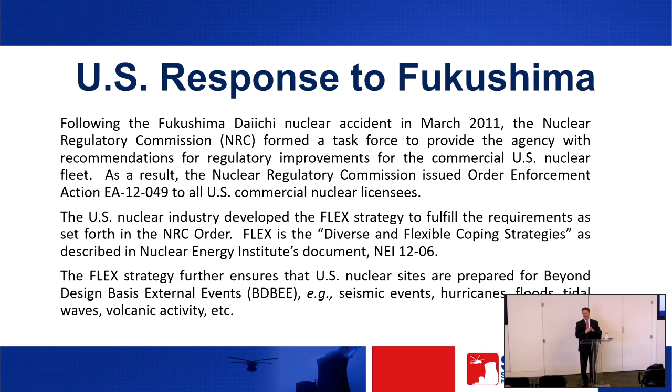The key aspect is that we are preventing this event from damaging the site such that we have a radioactive release. Everything is a preventive measure, such that we're not responding to an event where the reactor has gone south on us. We're responding to keep it from going south. That's the whole impetus behind this approach. Okay? So here's what the order looks like. It's about 3 more pages deeper than this, but here are some of the core tenets of the order that the NRC put out. The key point is to maintain or restore core cooling to the reactor, the containment building, or the spent fuel pool. Those are the key functions that this order is all about, and what was put in place across the U.S. nuclear industry.

So there are 3 phases to it. Phase 1, use of plant installed equipment and resources. So what does that mean? That means design changes that needed to be done to ensure that core cooling is maintained, or containment or spent fuel functions. Then phase 2: once we had design changes implemented at the plant, phase 2 was the transition into on-site emergency equipment. All of these sites across the United States have their own portable emergency backup equipment that they pull out of facilities, get to the reactor, and hook up to different connections to ensure that these functions are maintained. Okay, so that kind of makes sense. Phase 2 is the on-site emergency equipment.

And what I want to talk to you about today is the phase 3 equipment. That's the off-site emergency equipment. I'll talk to you about the deployment, what kind of equipment we've got, how much equipment we've got, what its capabilities are, and all those sorts of things. Okay, so phase 3, off-site emergency equipment.

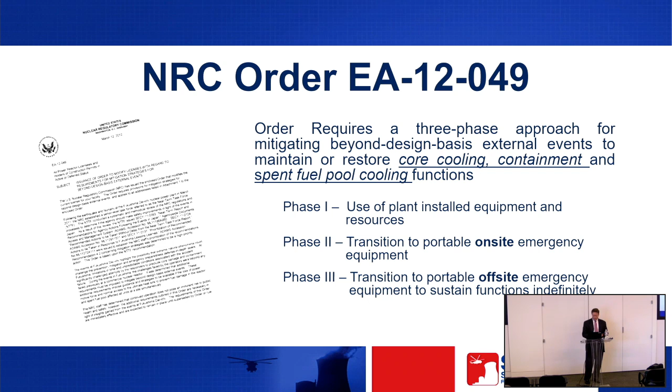All right, so when we first started this, the nuclear industry said, all right, who are we going to get to put this program in place for us? Well, the nuclear industry already has a company that they've established. It's called the Pooled Equipment Inventory Company. And that's a company that was established by the nuclear industry for the nuclear industry to store and maintain long

lead time equipment. So the Pooled Equipment Inventory Company teamed up with Framatome, and I'll talk more about Framatome here in a minute. But Framatome is the old Areva. Areva just went through some transitions about a year and a half ago, and the U.S. entity that we deal with of Areva is now called Framatome. All right. So they contracted with us to develop and manage a National SAFER Response Center program. So that's what we'll be talking about.

All right, so a little bit about the program. It meets the requirements of NEI 12-06, the Nuclear Energy Institute's document that I talked about, which established the Flex strategy, and the requirements of the order EA-12-049. It was endorsed by the NRC back in September of '14. We've done 2 proof of concept drills with the NRC. We've successfully completed 2 NRC inspections with no findings.

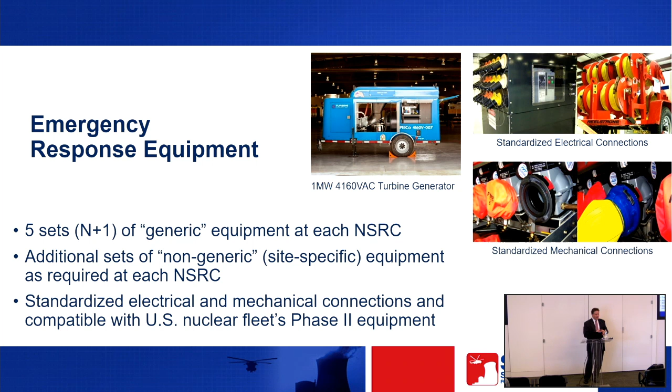NRC has been very adamant about inspecting this across the United States. So we know that when this equipment shows up, they can connect it to the plant sites. And that is a very, very big deal to get the United States industry to all agree to using the same size connectors. So that was a fundamental core design parameter that had to be established early on, and it has served us well.

Okay, so a little bit about the equipment design. The bulk of this equipment is first in kind. So what does that mean? Well, we had to design the equipment to fit through the cargo door of a wide-body jet. We had to design the equipment light enough so that we could fly it underneath a heavy-lift helicopter. We had to design the equipment to where we could operate it in Arctic and desert conditions.

So that threw a lot of challenges at our suppliers when we were going through the specification and procurement phase of this. A lot of these people build a lot of different kinds of pumps and generators, but when you start throwing these kind of constraints on them, a lot of people were out. There was a lot of custom engineering just to figure some of this out. And I'll show you a generator here, and I'll point out some of the details just to show you what the difference is. But this really, really drove the cost of this equipment up.

Another key aspect about the equipment is that it's all operated on diesel. Why diesel? Diesel is what the sites have in their emergency day tanks, okay? So typically plant sites across the United States have roughly 70 to 150,000 gallons of diesel on hand. So all equipment runs on diesel with a minimum 12-hour run time. You have a lot of equipment deployed on that site. You're going to have people full-time just fueling equipment just to keep it operable. So that 12-hour runtime was very important.

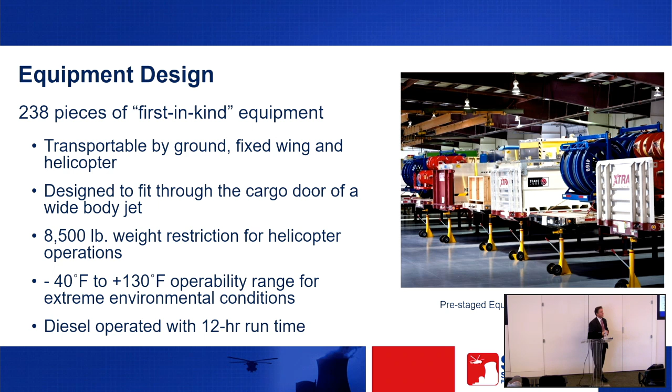That's one of the givens. That's beyond... having the fuel on site is a given. That's correct. That is correct. That is a given that the NRC agrees to. That's correct. Good question.

All right, so here are a few equipment examples. There's a water treatment system there in the top left-hand corner. That's a very important piece of equipment. It was actually manufactured for us in Israel, so we had people over there as we were going through the build phase of this thing. But this equipment here takes seawater or brackish water and makes reactor quality water. That's ultra pure water. That is water you would not want to put in your body. So it can take just the dirtiest water and make water we can actually input into the reactor.

The next one over there, we'll look at the green pump here, 5,000 GPM pump. That one will fill your backyard swimming pool in about 5 minutes, okay, if you got a 20 by 40. That's how much water that thing's moving, okay? And I'll tell you a little bit more of the overall capacity of the NSRC.

The turbine generator up there, it's a 1 megawatt, 480 volt turbine generator. We've got 4160 volt turbine generators. You're not seeing the picture there, but you have over 30 megawatts of capacity of power within the NSRC. That's enough to power about 24,000 homes. Okay, so that tells you what we're bringing to bear.

But that piece of equipment right there, we talked about custom design. If we did that with a regular diesel engine instead of a turbine, it would take up an entire flatbed trailer, and it would weigh anywhere between 43,000 and 48,000 pounds. With that gas turbine, we can get it in under 8,500 pounds. So that's some of that custom-built stuff we're talking about.

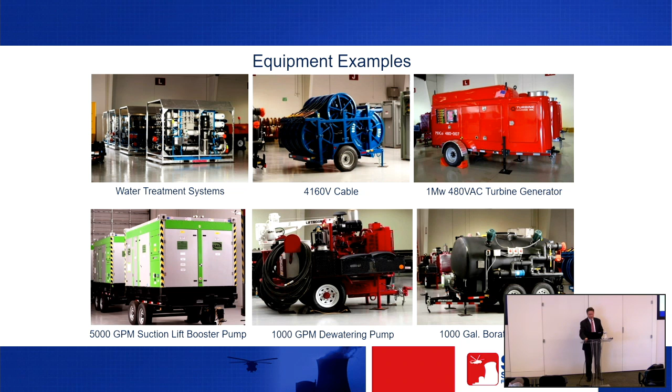So it's a massive response that's available to these nuclear sites. When it's all said and done, there's really enough equipment there for about 10 reactors, if you count both sets in both response centers. So it's a huge response. Sonia has seen it and really kind of taken in the magnitude of at least one of the response centers. So there's a lot that can be brought to bear for the U.S. nuclear fleet.

Okay, now it's fun to have all this equipment, but you got to get it there, right? I've had Bob Willard, the president of the Institute of Nuclear Power Operations, who was a commander or admiral of the Pacific Fleet, through, and this is what he honed in on. He wanted to know how you're going to get it there, right? If anybody knows logistics, it's an admiral of the Pacific Fleet.

So we have some key contracts in place with FedEx Custom Critical. Now, this is not the FedEx that you and I would use to send a package overnight. This is a white glove service that they offer to like 2 other entities in the United States for emergency response. Key part about FedEx Custom Critical, they were the first airplanes back up in the United States after 9/11. They have those kind of connections in Washington, D.C. with the FAA. So they are a key player in our response. They provide not only the tractors and the trailers to haul this across the roads, but also the wide-body jets.

I will tell you that we drill with FedEx routinely, and it's always real-time drilling where they're pulling planes out of the air and what they've got available, when they can get truck drivers there to pick up the equipment. So it's all real-time drilling when we do it with FedEx Custom Critical. As far as helo, one of the key lessons learned from Fukushima was the ability to get the equipment into the site.

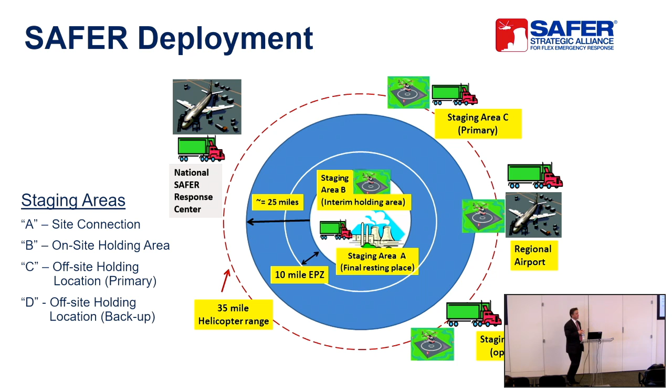What happens is he's going through that event. He's going down through his procedures, and it takes him to a point. Okay, and then it tells him execute off-site emergency equipment response, or the SAFER response. That throws him into another procedure. So there are procedures that operator is going through. It is not the Nuclear Regulatory Commission who makes the decision. It's the guy that's licensed at the helm. Okay, and that's what he's tasked to do, is to protect that plant. Okay, good question.

Do our connections still work that we hook all this equipment up to? What's the damage assessment to the staging areas? What equipment do we need to get in place to start removing debris? All those different things. What time are we going to be prepared for the equipment to start arriving?

Then the SAFER team on the bottom there, they're going to start activating through their site response plans all of their different coordinators. They're going to stand up the NSRCs, the SAFER Control Center. They're getting in touch with FedEx Custom Critical. They're calling the helicopter providers and getting the technicians moving from around the country towards the event and getting them into those forward locations.

Then the FedEx trucks start arriving. We're making a decision to either move it to the airport, we've got to fly it, or we're going to drive it all the way through. Trucks start arriving at the staging area, and then ultimately leaving the staging area at around 1900 or so and arriving at the site within about 24 hours. And I know I just said a lot, but that kind of lays it all out. Maybe you get back and you look at the presentation, it'll make a little bit more sense. But a lot going on there.

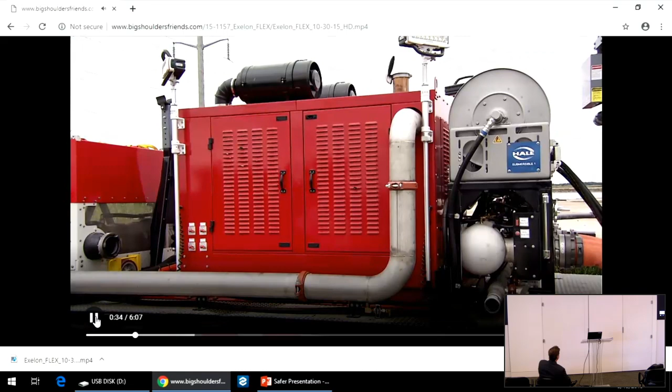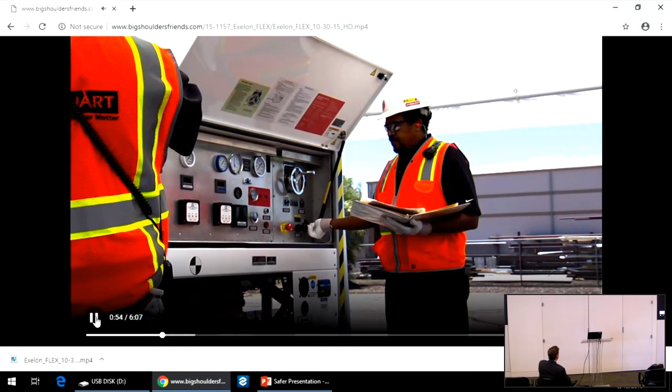In March 2011, the Fukushima Daiichi nuclear facility was struck by a massive earthquake and a tsunami that overwhelmed the site and its emergency systems. Since that event, the U.S. nuclear industry has changed its readiness approach for an extreme natural disaster. That solution is called FLEX. FLEX is a $4 billion industry effort to further strengthen U.S. nuclear facilities against natural disasters. The uniqueness of this strategy is that portable backup equipment designed to supplement a site's existing equipment can be deployed at a moment's notice. The Flex strategy uses the plant's installed backup equipment, on-site portable backup equipment, and additional off-site backup equipment which can be in place at any nuclear facility across the United States within 24 hours. That's an extraordinary turnaround. Flex adds yet another layer of protection to our plants.

Exelon sites are well prepared for an extreme event, and what you'll see in this video is that Flex strategy at work. It is a well-orchestrated plan involving a nuclear site, industry agencies, and national response centers. We are committed to operating our plants safely and to protecting the public, the communities, and our employees. Hi, this is Mike on Unit 1. We've had a loss of off-site power and our diesels have failed to start. Within seconds, operators initiate their emergency plan. Every 6 weeks, they simulate situations like this and are well prepared for the real thing.

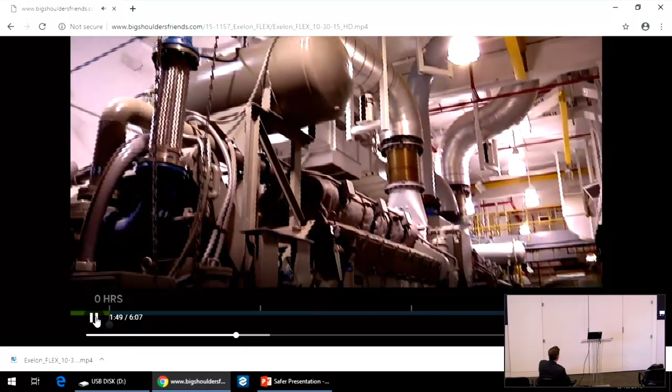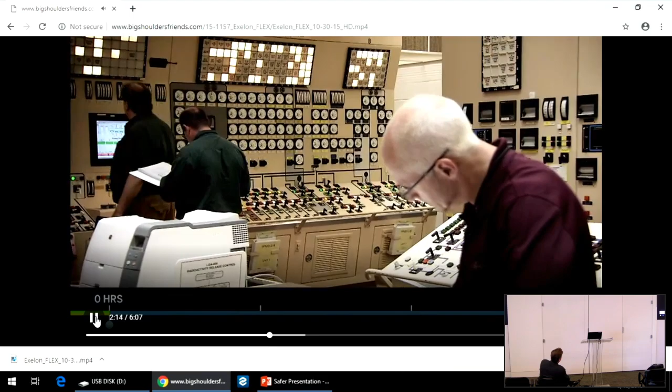In the unlikely event that power is lost, the plant's reactors shut down as they are designed to do. Exelon plants have a minimum of 2 backup diesel generators, which would start automatically to provide power. If all of those generators fail to start, then a multitude of backup batteries would kick in to provide power. We have equipment that is always on standby and is always ready to 100% cover the core if necessary. If something fails, then our Flex strategy provides a backup to the backup. The Flex strategy starts when there is an extended loss of power to the plant, and all of the plant's backup generators fail to start. All right, due to the extended loss of offsite power, we're going to implement the Flex strategies.

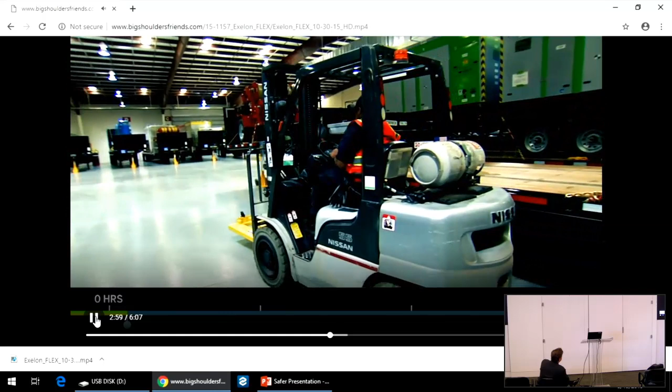Plant operators inform the company emergency coordinators that the Flex strategy has started. They also contact industry organizations to get extra equipment from other nuclear plants. Emergency coordinators then contact SAFER, the control center for the industry's 2 national response centers in Memphis, Tennessee, and Phoenix, Arizona, which send even more equipment as backup. These centers are football field-sized warehouses that store additional Flex equipment for the nation's nuclear plants that can be dispatched at a moment's notice. Timing is extremely critical.

We have to have the first piece of equipment on site and connected to the plant and operating within 24 hours. Trucks arrive to pick up preloaded equipment trailers. From here, the equipment travels to the affected site. We want to have our first trailer on the road by 3 hours for sure.

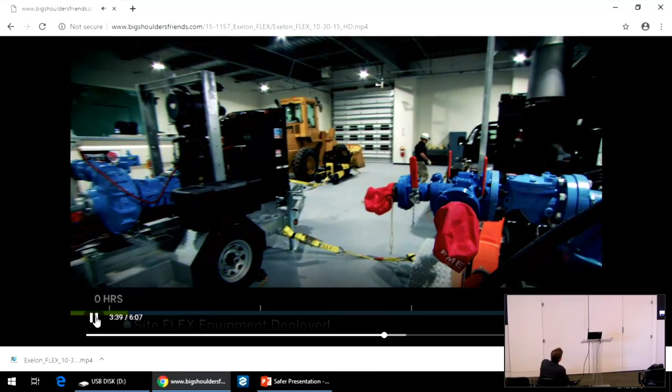Meanwhile, operators at the plant are already in motion. Each plant has its own flex building and backup equipment. The building's rebar reinforced concrete walls are nearly 2 feet thick, and the doors are covered with Kevlar, all of which protect the equipment inside from anything Mother Nature might throw at it. Equipment is mounted on trailers for easy transport.

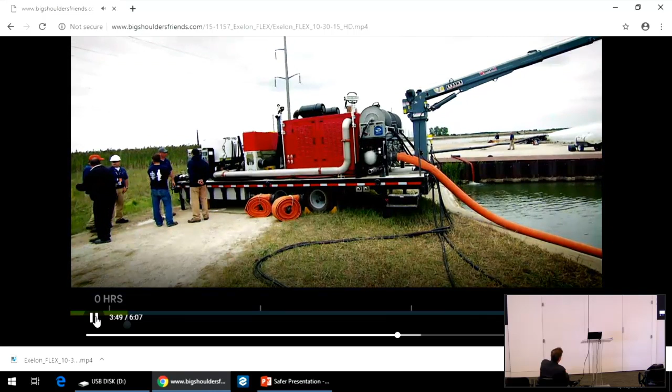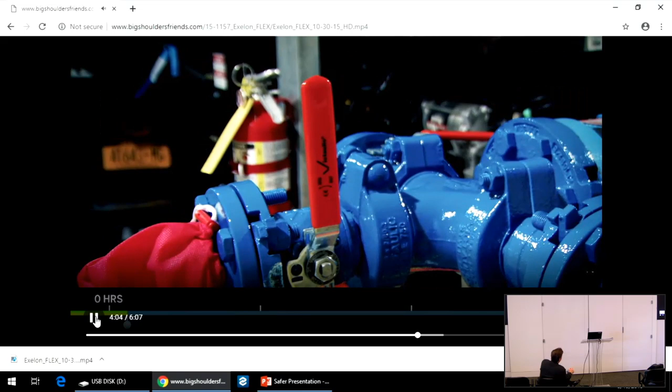Backup equipment here and at the Safer warehouse includes pumps that can fill a backyard swimming pool in 5 minutes, about a quarter mile of industrial-grade fire hoses to carry water to the reactor, huge generators that can power plant safety equipment, and lights that can illuminate 5 acres. These pumps and generators use standard connectors so they can easily hook up to any external flex equipment brought to the site.

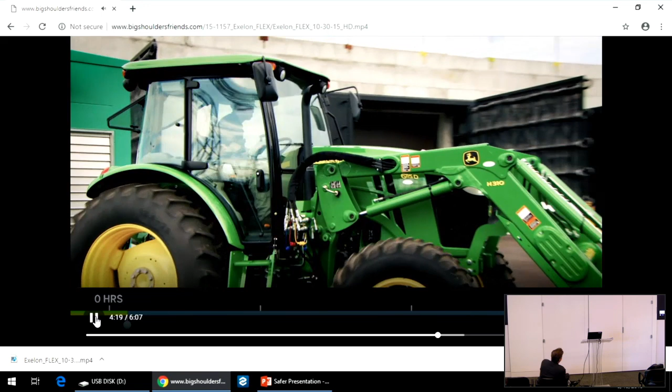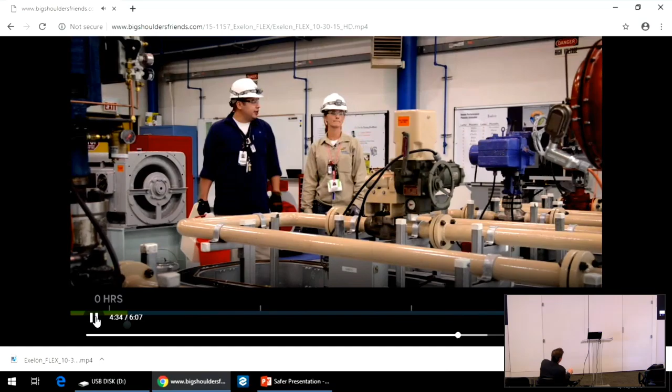We bring our equipment out of here and we have pre-planned routes throughout the site, and the routes are based on speed, ability to get around fallen debris. Inside the plant, operators monitor the reactor, plant systems, and conditions. Equipment is continually checked. They make sure the reactor and used fuel pools are being adequately cooled.

Back at the response center, the first of the backup flex equipment begins to leave the warehouse. Meanwhile, all plant equipment is moved into place, hooked up, and is operational within 8 hours. And then it all becomes the communication with those off-site facilities, making sure that that equipment is arriving and we understand when it's getting here so that we can phase in the longer-term equipment and phase out our initial flex equipment response. The flex equipment from the response center begins to arrive at a staging area.

Every piece of equipment has to be below 8,000 pounds so that once it gets to a staging area, if there's no way they can get to the plant by road, they can be airlifted by helicopter. Operators continue their actions as more portable flex equipment arrives and is staged. Everyone locally and across the country is on notice until the emergency is over. The flex equipment can keep the plant safe indefinitely. The goal is to get power restored to the plant as quickly and efficiently as possible.

We've done the homework, we've done the logistics, we've done the coordination at the federal level, and we are very prepared. We want folks to know that we're properly dealing with the situation at hand and that the plant is safe and the public is safe. No doubts whatsoever.